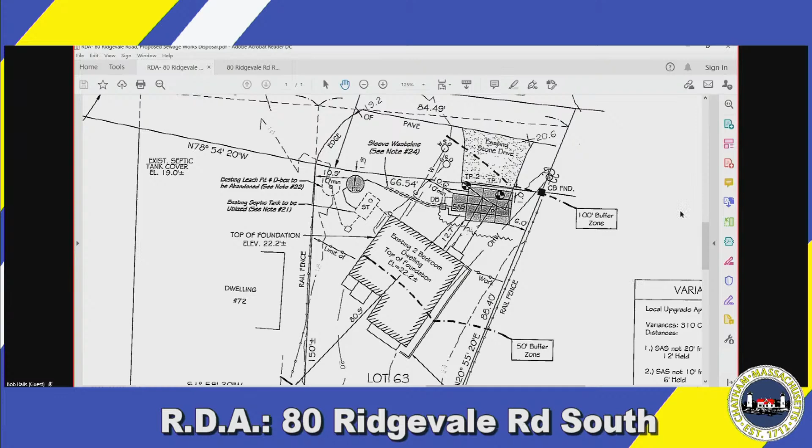Thank you. Okay, with that, is there a motion for a negative determination? Yes, Bob Rawls, I move for a negative determination. Clark, second. Roll call vote for a negative determination for 80 Ridgevale. Commissioner Rawls, aye. Delvecchio, aye. Clark, aye. I vote aye as well. So that's approved unanimously. Thank you, Ms. Cronin, thank you very much.

Bye-bye. All right, Paul, let's move on to the next one. Next on the agenda is an RDA. The address is 108 Mill Hill Road, Jonathan Reyes. Proposed construction of a second-story dormer within the 50-foot buffer at 108 Mill Hill Road, assessors map 4H, parcel 7.

Is Mr. Reyes on the line today? Okay, that's not expected after his submission. Paul, what do we do? We have no applicant. Given the nature of this project, can we go ahead and... Absolutely, yeah, you don't need to have anybody here. Maybe he's having trouble getting in, but there are really no issues with this, as you know. So you absolutely can go forward.

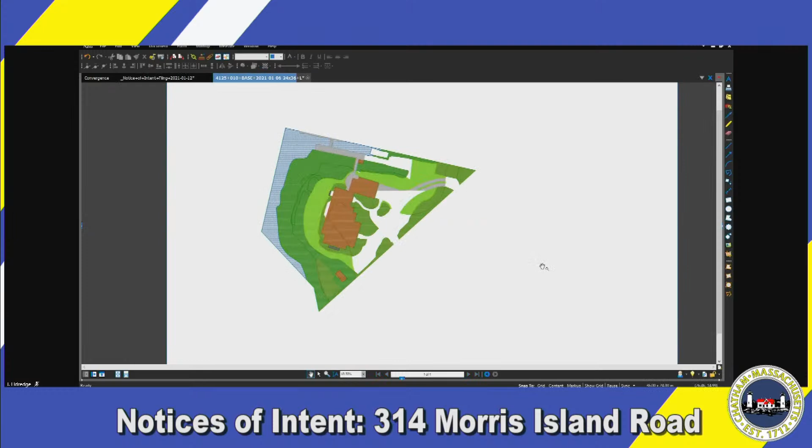Okay, can you zoom in just a little bit more on that so we can... Okay, thank you. So all of those issues about the location of the garden and the shed within the no-disturb zone to the coastal bank are one thing, and we can address that and get into that and go through the variance analysis.

But the preliminary problem, I think, is that the order of conditions when this house was constructed had mitigation for the construction of the house, and the garden and the shed are in not only the no-disturb zone, they're in the mitigation area. And the order of conditions has a special condition that says, as an ongoing condition, that the mitigation area shall be allowed to naturalize in perpetuity.

And it goes on to say that naturalize means the area is left undisturbed: no use of fertilizers, no removal of leaf litter or duff layer, no weeding, no subsurface irrigation, no hardscape, significantly no structures of any kind, no creation of lawn, no dumping of yard debris. So the bigger problem, beside the no-disturb zone that he's facing, is this ongoing condition.

And we've been down this road before about the commission looking at an ongoing condition that a prior commission has imposed, and feeling reluctant at best and unwilling to go against a special condition that the commission has imposed as an ongoing condition, for lots of viable and valid reasons. We don't want our conditions to be ignored by a subsequent commission.

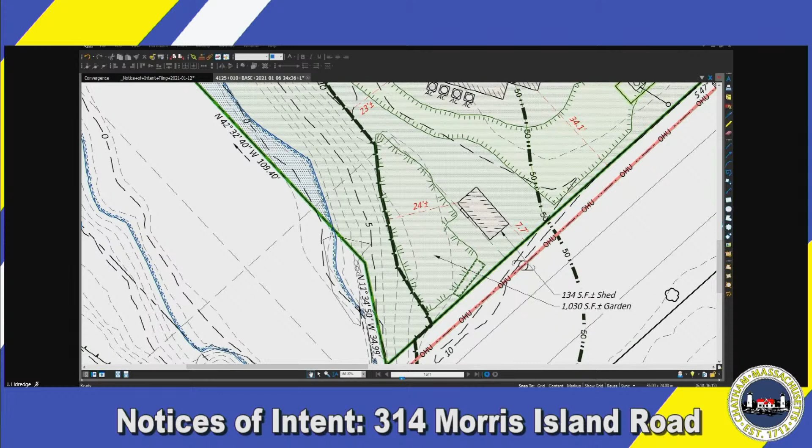I mean, the significant portion of the property is in the no-disturb zone. As I look at that, at the boundary, it runs - you can pull out a little bit, Thad - that no-disturb zone line runs right through the house and out the other side. I mean, I guess I should put the question to the commission. Would anybody be willing to consider an organic garden and possibly a shed in the no-disturb zone, but outside of the mitigation area? Is that an option?

Well, let me ask you guys, is that an option for the homeowner? Well, Madam Chair, Bill Riley, it's certainly something we'd like to consider. Other than getting an absolute no, I would say yes. We'd like to be able to explore that option.

Okay, then maybe it's premature to - unless you want to hear the view of the commission about whether they'd be willing to consider either the garden or the shed or both in the no-disturb zone outside of the mitigation area. Go ahead. Yeah, we'd like to. Yeah, because we don't want to spend time.

Well, I think you'll find, and I'll just kick it off by saying that there's a lot less objection to an organic garden, and I think we have seen this in no-disturb zones. The issue we run into is the fencing. I understand from a homeowner's perspective that if you're going to the trouble of having a vegetable garden, an organic one, you want to have some vegetables left to you that don't go to the critters. But fencing in the no-disturb zone, as we keep coming up against, is a problem, and a shed is also a problem. So I think it would take some creative thinking on the part of the homeowner to figure out how to continue having an organic garden and raising vegetables on his lot.

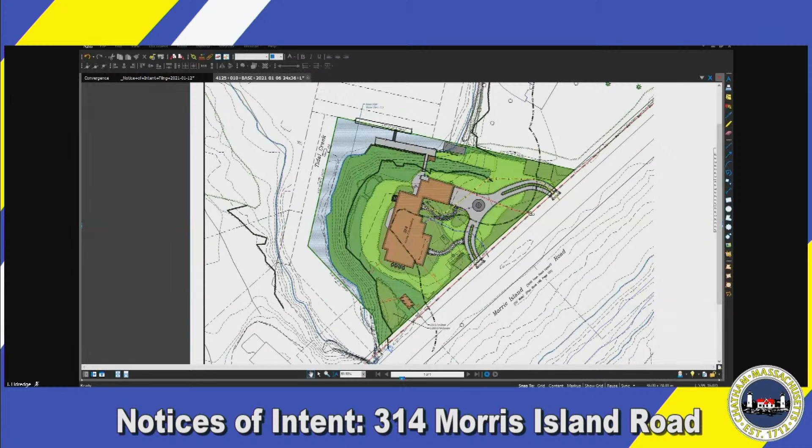Thank you. All right, motion to continue 314 Morris Island Road to March the 10th. Rawls moved to continue to March 10th. Second. Okay, roll call vote to continue to March 10th. Commissioner Rawls, aye. Delvecchio, aye. Clark, aye. I vote aye.

We'll see what they come back with on March 10th. Thank you, guys. Thank you very much, Madam Chair. Okay.

All right, Paul, move on. Next on the agenda is a notice of intent, 201 Old Harbor Road, Scott Brennan Properties LLC, applicant, Brenna C. Melvin, owner, SE, still don't have an SE number, continuance of a hearing on a notice of intent for the proposed construction of a cottage, removal of existing cottage, and relocation of a shed. Assessors map 15F, parcel 62A. The landscape sketch plan has been received.

Is there anybody here on behalf of the applicant today? Hi, this is Scott Brennan. Yes, Mr. Brennan, co-owner and contractor. Okay, so I do see that the proposed site plan has been submitted.

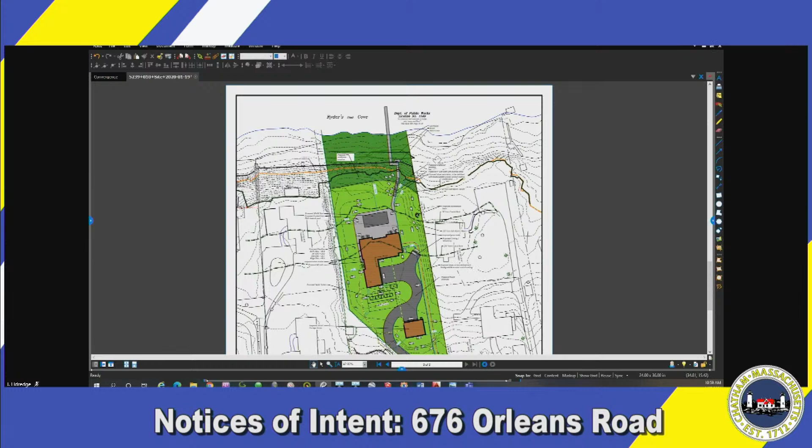Yeah, I just had a question about the stairs going down from the patio area. I was concerned that while they're very tasteful, their structure, especially with a straight shot of stairs, might lend itself to rainfall carving out some swales along the edge of the stairs. Am I misunderstanding something or missing some key point, Thad?

No, but we don't expect that much rainfall. As we discussed at the last meeting, everything's going to be matted, so we'll have erosion control in place, and then everything will be planted. We'll have seed out there for part of it, and wildflower meadow for the rest. The stairs themselves, most of the stormwater generated will pitch right back into the crushed gravel or crushed stone.

That's what I was going to say in response to Tom's concern - to the extent that water actually goes down the stairs, the center of each stair is crushed stone that will enable the water to infiltrate the substrate. So it's hard to imagine this being a real serious erosion problem there.

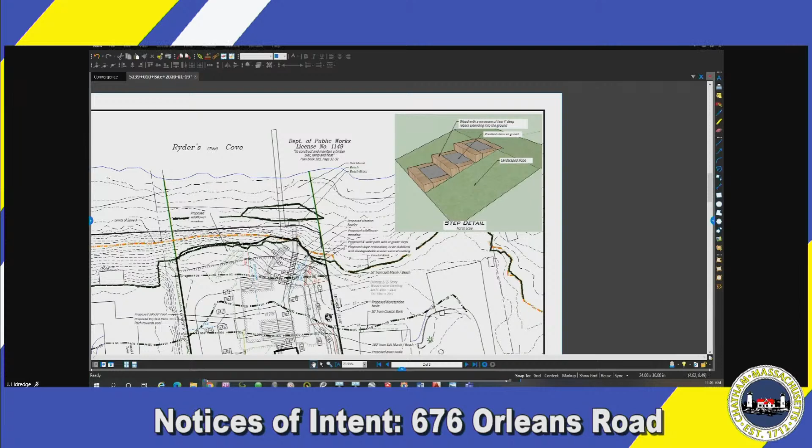Okay, thank you. I had one other question - let me find it here. Yeah, on your WPA Form 3... go back to the site plan. Pardon me, I want Thad to go back to the site plan. Sure, okay, there you go. Sorry, Tom. It's all right.

Go ahead, Tom, what's your question? I just noticed on section sub B, regarding buffer zones and resource area impact, that there are a lot of resource areas that I would think on this property would be impacted, but they're not even discussed. The boxes aren't checked, none of that. I'm always concerned that we're missing things because they're being left out. I was wondering why that section was completely blank.

Almost completely blank - we are impacting about 50 linear feet of coastal bank, which has been specified there. That's the revegetation where we're taking out the lawn. We're not buffer zone only. The other resource areas on the site, we're out of. The most landward resource area being the top of that coastal bank. Our proposed work stops at the top of the coastal bank, so we're not impacting the salt marsh or the beach grass down below. Those were all part of the pier and seawall proposals.

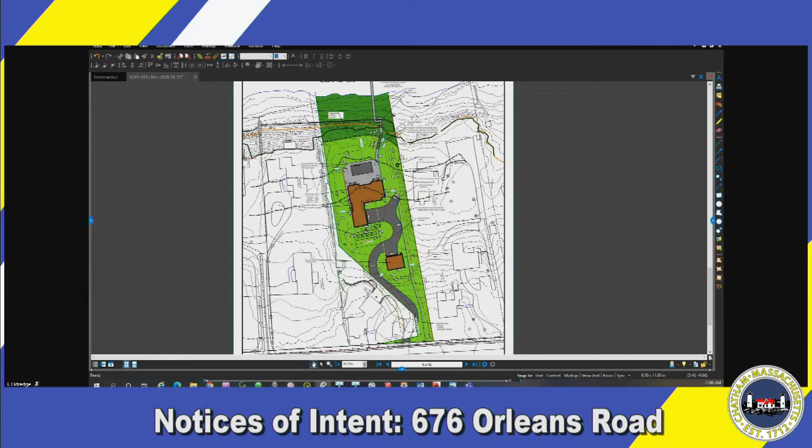Hold on, Tom, can I add one thing, Madam Chair? That DEP form cannot be modified - it's a DEP form. The way we address the other interest Tom's referring to is, through the resource analysis they do for impacts, and as you just said, list it in the order of conditions that goes out. But that form itself is a DEP form, and even though we do merge the two things together in the application, we separate out the bylaw issues and resource areas from that form. So I hope that answers your question, Tom. It does, thank you, great.

Okay. Any other questions, Tom?

Just to get back to the question about impacts on the salt marsh, the beach, and the beach grass: there's a vinyl sheet pile between the proposed work and those resource areas. There's no chance of affecting them. It helps. It never says never, but it largely prevents any impact.

Okay, other questions from other commissioners? Bob Delvecchio, do you have questions for Bill or Thad? Yeah, I have a question about the lawn area. Is it going to be irrigated and so forth?

He would like to maintain the irrigation. We said at the last hearing that we're probably going to see in the order of conditions a prohibition on irrigation, but we can still ask for it. The lawn is currently irrigated right out to the top of the bank. We'd be pulling everything back into the lawn area. We're willing to put in conservation mixed grasses on the entire property in exchange for that irrigation. Yeah, well, once you start irrigating, then you go down the road of fertilizing and applying pesticides and the whole thing.

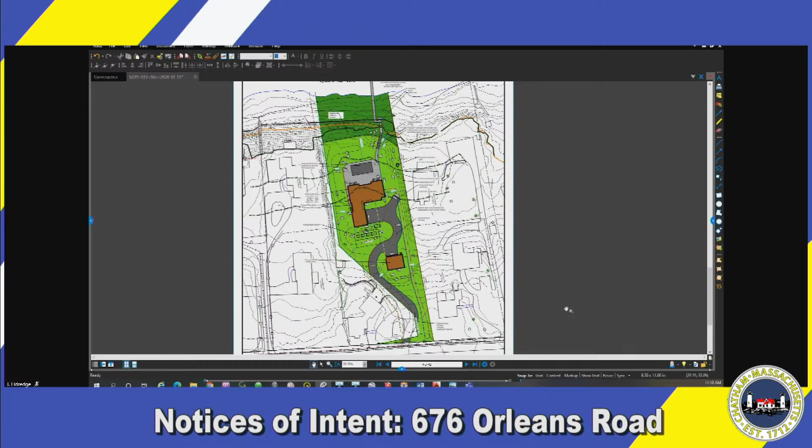So they're in support. Okay, sorry about that. Roll call vote to continue 676 Orleans Road to February 3rd work session. Commissioner Rawls? Aye. Delvecchio? Aye. Clark? Aye. I vote aye. We'll take it to the work session. Thank you. Thank you.

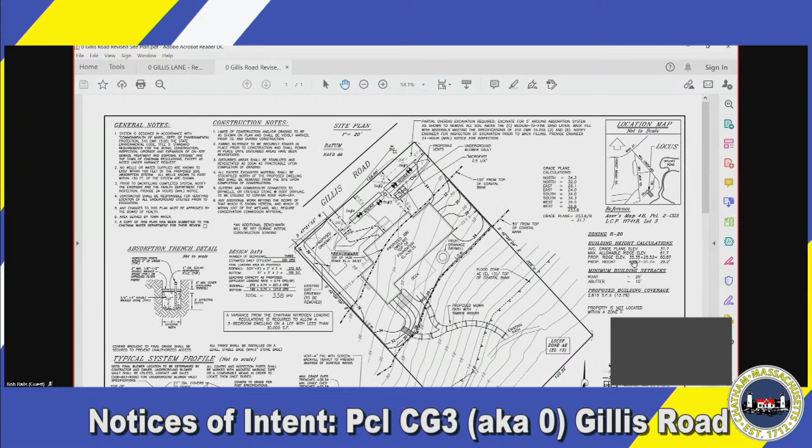Good morning, Commissioners, Madam Chair, David Lyttle. I believe I'm here with Teresa Sprague of Blue Flax Design. The plan before you had one minor change: we have shown a dry well on the engineering plan. I had a discussion with Mr. Clark at the last hearing relative to the use of downspouts and dry wells or crushed stone at the roof drip line. The applicant likes the idea of crushed stone at the roof drip line, but around the deck they may include gutters and downspouts. So we have included a proposed dry well location landward of the limit of work in the lawn area adjacent to the deck. That is the only change to the site plan.

And I think the majority of the concerns and questions were relative to the path and the vegetation and trees on the Blue Flax plan. Thank you. Thank you.

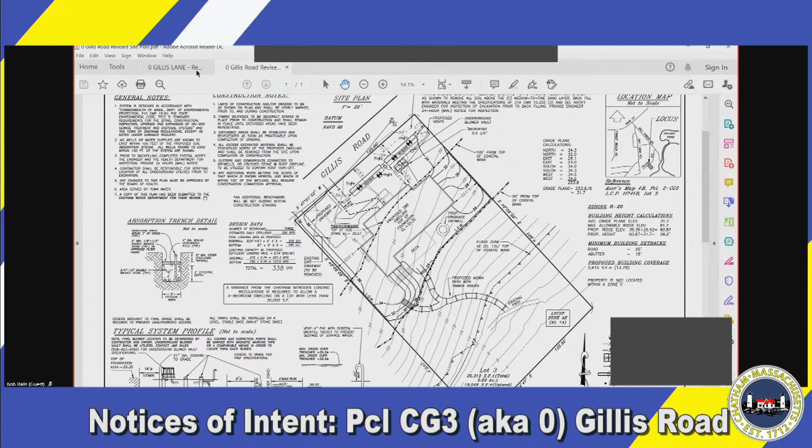We had some changes made, very briefly. We had a request to add more oak trees to mitigate for the number of trees being removed. As you recall from the last hearing, there are 22 trees proposed for removal for construction of the dwelling. We are proposing to plant 17 trees back. We added 5 additional oak trees to our planting plan, along with red maple, pitch pine, and Amelanchier canadensis, serviceberry, Canada serviceberry.

In addition, we planted the shrubs a little more heavily around the pathway proposed from the house to the existing footpath that runs along the edge of the marsh. We also moved the vegetable garden at least partially out of the 50-foot buffer zone to get some square footage out of the no disturb zone. The property owners would like to take advantage of the small level area at the base of the deck, just to the east of it. The garden will be organic — we discussed that with them at length, and that's how they currently garden. It consists of 2 fairly small raised vegetable beds, one changed to a 10 by 20 raised vegetable planter. So not a significant impact in the no disturb zone, and no vegetation will be removed to construct that garden.

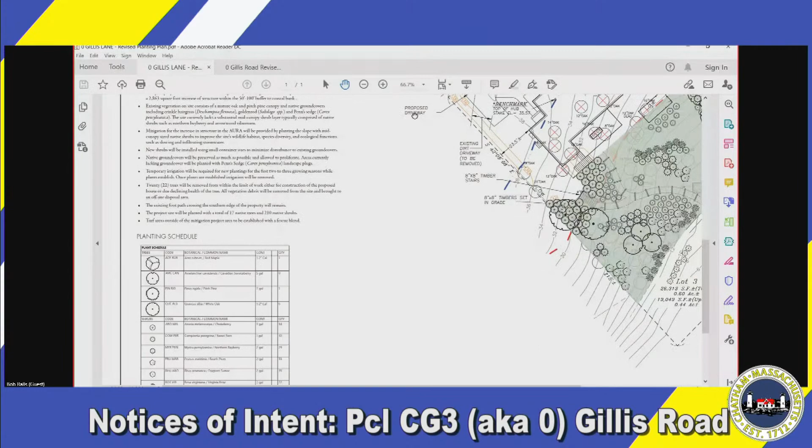5, 6, 7. It looks like there may have been an amelanchier removed. So, oh, I'm sorry, there's 8 amelanchier - I'm counting that on the plan, and that's what's in our table. You'll have to forgive me. This planting schedule is basically generated by the AutoCAD program we use, so there should not be a discrepancy at all, but I will certainly be happy to double check that. What's in the planting schedule would be what's actually going to be planted.

Okay, so it is 1 short in the schedule. We have 6 white oaks, 1 pitch pine, 8 Canada serviceberry, and 1 red maple. And I believe that's what's showing on the plan.

Right, but the note just says 17 and that's 16. Oh, my apologies, I'm not looking at the notes, I'm looking at the plant schedule. If that's the case, I do apologize and I will correct that. And similarly with the shrubs, whenever I counted up the shrubs, the notes disagree with the table. I will make sure the notes match the planting schedule. My apologies.

The only other issue I had is the organic garden. We're getting all sorts of requests for these organic gardens in the no disturb zone, and I think we need to be consistent on it. There was another application here today that wanted the same. As I pointed out then, I'll point out now, organic is good. However, habitat is lost - it will attract pollinators, but nothing is going to burrow there, nest there, etc.

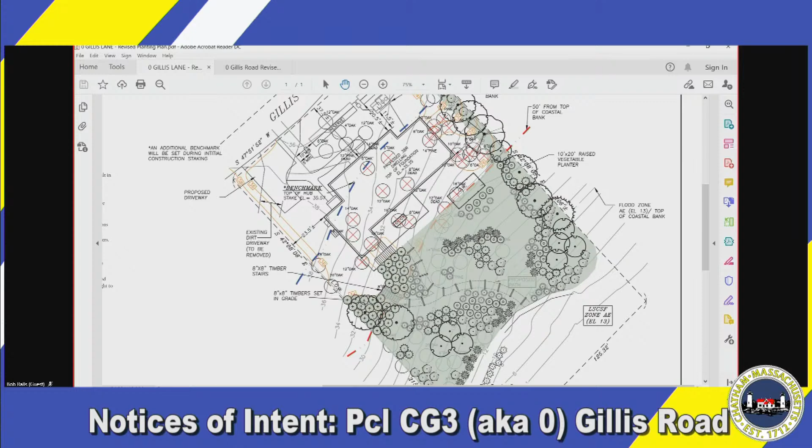I think that's a great idea. Great, thanks, that's what I meant, David. Thank you. Okay, so Teresa, can that be done? Yes, to suite? Yep, yeah, absolutely, we can get that done for today. So it'll come out of the plan, out of notes, out of the narrative. Yes, and I will also submit a plan for you with the corrected plan notes with the tree and shrub counts.

Excellent, thank you. With that, do we have a motion then to take this proposal, as it's about to be revised in the next 2 days or so, to the work session on February 3rd? Bob Rawls moved to continue to work session on February 3rd with amendments or revisions that we discussed. Clark, second. Roll call vote to continue 0 Gillis Road to the work session on February 3rd.

Commissioner Rawls, aye. Delvecchio, aye. Clark, aye. I vote aye as well. We will take it to the work session for an order of conditions.

Thank you, and thank your clients, we appreciate their efforts, but we have other issues to keep in mind at the same time. It gets hard to balance. Understood, thank you. Okay, thank you.

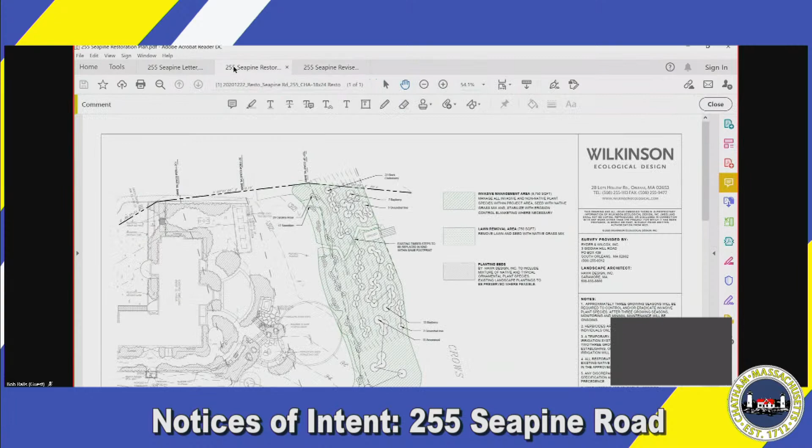There is little or really no erosion created by these steps because they're so well vegetated. So I would anticipate that once they go back in, there might be some minor tamping of vegetation and grasses around them, but I don't anticipate any stormwater issues from the in-kind replacement of the steps.

Additionally, I took a look at the drain near the top of the coastal bank and the lawn that has been abandoned for quite some time. It is filled with dirt. Those metal grates aren't serving any purpose, so they can be removed. I think that more or less addresses the concerns from Ryder and Wilcox's perspective. So I'll pass it along to one of my fellow presenters. Thank you.

Good morning, Katrine Higgins from Wilkinson Ecological Design. We made some minor refinements to both our land management plan and our restoration plan. First, in our land management plan, we provided additional detail on the quality of the vegetated buffer strip we're proposing. Overall, that buffer strip will improve infiltration on the site and allow stormwater to seep into the ground before it has a chance to become runoff.

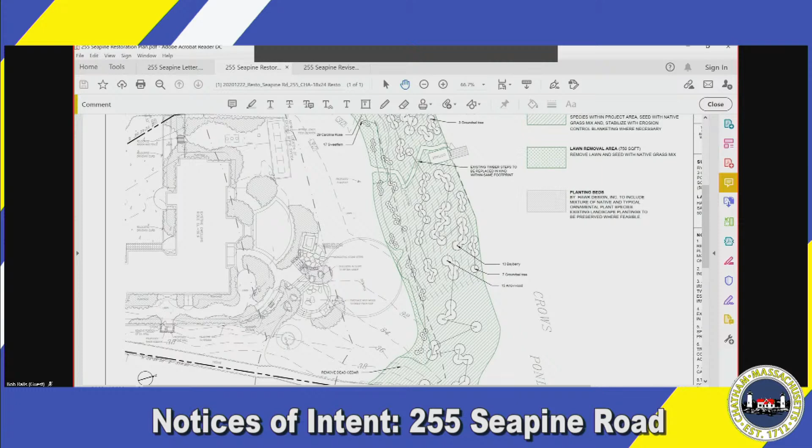Okay. With that, I think we are ready to schedule this to go to the work session. So is there a motion to continue this to the work session on February 3rd? Bob Rawls moved to continue to work session on February 3rd. Second.

Roll call vote to continue 255 Seapine Road to February 3rd. Commissioner Rawls, aye. Delvecchio, aye. Clark, aye, and I vote aye. That's unanimous to go to the work session for the order of conditions. Thank you, everybody. Thank you, David, Katrine, and David. Thank you, appreciate it.

All right, Paul, last one coming up. Last one. Thank you, Madam Chair. Next on the agenda is a notice of intent continuance hearing for 155 and 157 Bridge Street.

Eastward Companies is the applicant. Mitchell River Nominee Trust, William R. Enlow, trustee owner, SE 10 3452, for the proposed demolition of an existing dwelling and one swimming pool, construction of a new dwelling and two new swimming pools at 155 and 157 Bridge Street, assessor's map 15B, parcel 1B, and we have received revised plans.

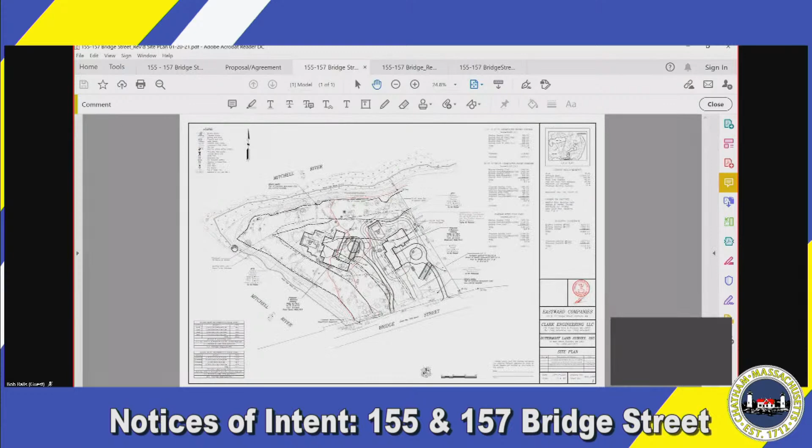The commission also wanted to know the disposition of the trees that were flagged in blue. Those trees were marked by Clark Engineering as the trees required to come out as part of the house construction, and strictly limited to that. Obviously, there are more trees coming out as described in Teresa's land management plan, but the ones flagged in blue were associated with house construction.

Okay, thank you for that clarification. Shall I start? Yes. Okay, hello, thanks, Teresa Sprague with BlueFlax Design again.

Just confirming, I did go out to the site and checked on the blue flagging and realized that indeed all of the trees flagged in blue are just within the structural footprint. So we did not flag any trees outside of that area as part of BlueFlax's invasive species management plan.

What we've done for this particular plan mainly was add a note regarding the removal of the chain link fence, similar to David's. Then Callie had requested that we change the graphics somewhat because the plans are quite busy, there's a lot going on. Normally a plan like this would be shown on several different plan set pages, but we need to get them all on one page for permitting purposes.

So we changed our planting graphics, adding callouts so you can see the plants more clearly and make it a little less busy. On the lower left-hand corner, we did an inset that basically shows the invasive tree removal, marked with red X's, without the planting overlay on top of it.

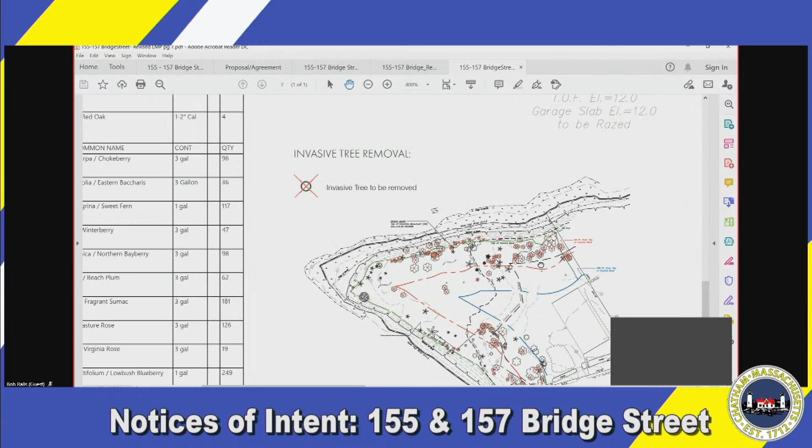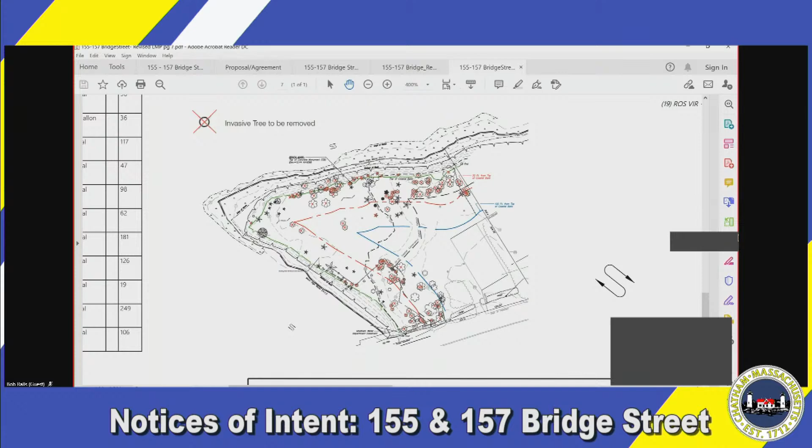Okay, thank you. I'm looking in my notes, I can't find it. How many trees, David, were flagged with blue that are slated for removal for construction purposes? I don't have that number handy, I can probably count them up quickly for you.

Are they identified differently on the plan, Teresa, than the invasive ones? No, they're not, they are all invasive. I believe there's a couple of ornamental trees, but they're mainly invasive, and they're shown similarly on the plan.

You can see on the larger plan they're basically in the footprint of the house, shown with red X's. Okay, so just to be clear, all of the trees slated for removal are either invasive or non-native ornamental. Correct. Okay, then I don't care, the count is less important.

Okay, I don't need to know that unless somebody else does. Let me open it up to questions. Bob Rawls?

Okay, yeah, here I am. No, the revisions do make it much more clear.

Is there not going to be a fence between these two properties? Are they designed to be two houses that are cohabited, as it were? Yeah, Madam Chair, this is going to be a condominium, so there'll be separate owners for the two structures. And the plan doesn't show a fence between them.

Other than that, I'm not sure. There's the issue we discussed early on about the pools being in the floodplain, and I don't know exactly what to do about that, but the issue remains. As Mr. Riley pointed out, we've approved it before. Doesn't mean we should have, but we did. I'm not sure that anything can be done about it in this particular case.

So overall, it's good. I applaud the landscape mitigation plan, and it's certainly going to be an improvement to the heavily invaded area that's there now. That's all I have.

Bob Del Vecchio, questions? I have a question about that holly, Teresa, that was marked with blue flagging.

That's slated to be removed. Can that be transplanted? I am not sure. Do you recall, Bob, where that holly was located?

Let's see, the house pictured here on the right is 157. It was behind 157, in the backyard on the north side. I apologize, I will have to go out and look again. I just can't remember right now. I went out quickly and looked at the blue flags, and very quickly realized they were flagged because of the house location.

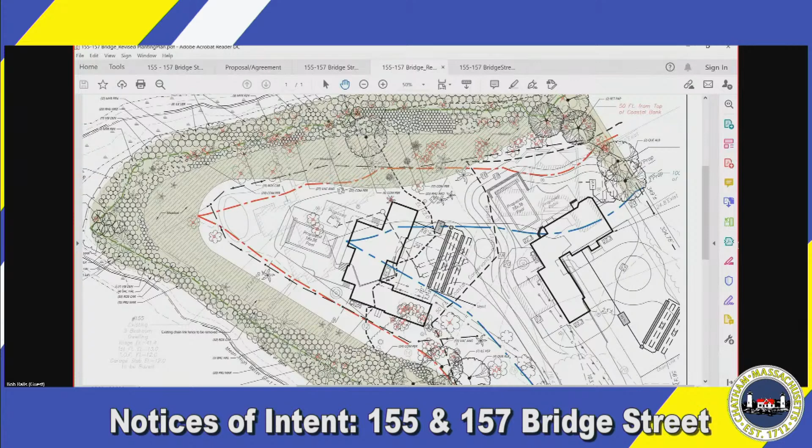I don't recall where the holly was located. Let me go back through my photos while we're talking about additional questions, and I may be able to find that. Excuse me, this is Andrew Garulay. On my plan it shows up, and I was careful to grade so it was not affected by that. I know the tree you're talking about.

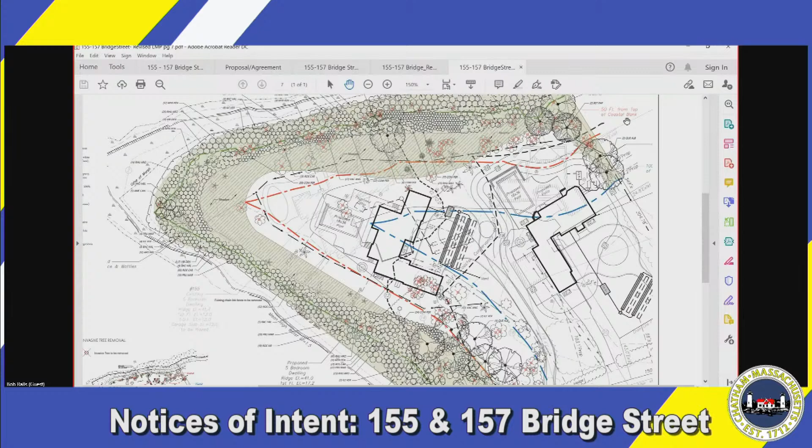If you look at the landscape plan, I don't know if you have that in front of you or if I need to share it. It will show that without a red line in it. Can you do that, Andrew? I don't know if I can share. I'll try to share, but I don't know if somebody else is sharing first. Let me release it. All right.

Okay, now you can try. All right, let's see what we have. It's right on the 50-foot line. Am I sharing there? Can you see? Yep, yeah, it's right there. I don't know if you can see my hand on there. It says LY, so that must be it. Yep, yeah, it's a Nellie Stevens holly. It's a 10-inch Nellie Stevens holly right on the coastal bank 50-foot line.

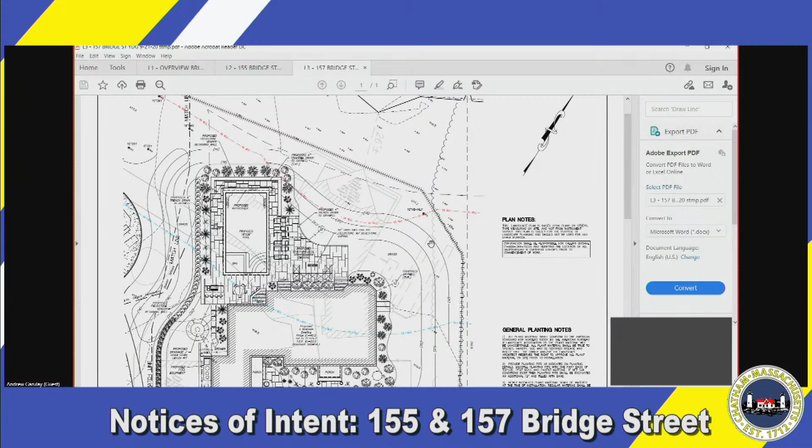I don't think that needs to be removed. Yeah, David Clark here. I will take the blue flag off of that. There were two other native trees within the work limit that had blue flags, and I took the flags off of those. There's no reason to remove those. So I can easily take the flag off of that this week, so there's no confusion when construction starts.

Yeah, so maybe put some construction fencing around the existing plants that are going to remain. I can move the work limit inside of that, so it's clear to the contractor. Okay, good enough, thank you.

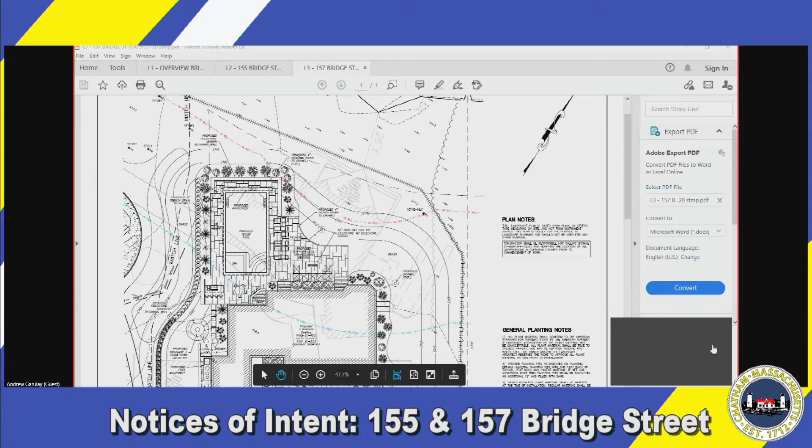Great. Tom? Yeah, David, you noted in the narrative that there's land containing shellfish, but I don't think it's ever been mapped on your plan. Is there any reason why that wasn't done? It's presumed that all the land seaward of the mean high water mark is land containing shellfish, so it's one and the same delineation as the mean high water mark.

Okay, and then, are you taking any steps to preserve those areas just so they aren't smothered by erosion or runoff? It's the same concerns as with the salt marsh, so a well-maintained silt barrier will do the trick as far as protecting those two resource areas. Thank you, that's all the questions I had, Janet.

Okay, thank you. Let me just double check my notes about the chain link fence, record, planting layer, confirmation. And then, of course, I have a note that I can't read because I wrote it. So, too bad, I think that is it.